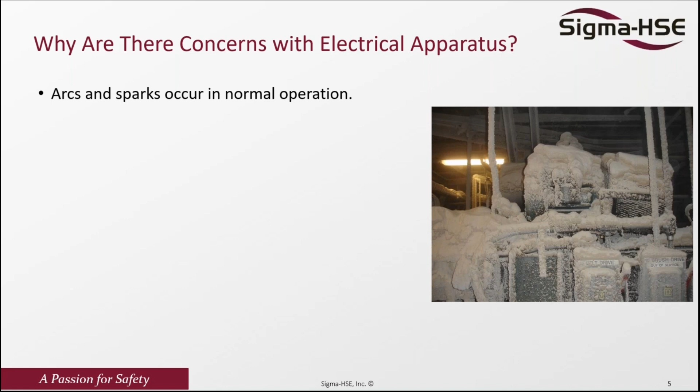And this arc or spark usually can generate energy up to 1,000 millijoules, and this could ignite a dust cloud or dust layer. Also, consumption of energy produces hot surfaces. So as you can see, normally during operation, as equipment consumes energy, it generates heat, sometimes frictional heating, which can actually serve as a source of ignition in the industry.

And malfunction of equipment, such as overheating, maybe of bearings - if you don't have a proper maintenance system, this overheating of bearings can actually serve as a source of ignition, creating a hot surface that could ignite combustible dust or vapor in the industry. Usually, if you don't select appropriate equipment - each appropriate equipment has its own temperature rating - so if I know the properties of my material, I'll be able to select the appropriate equipment for that specific area.

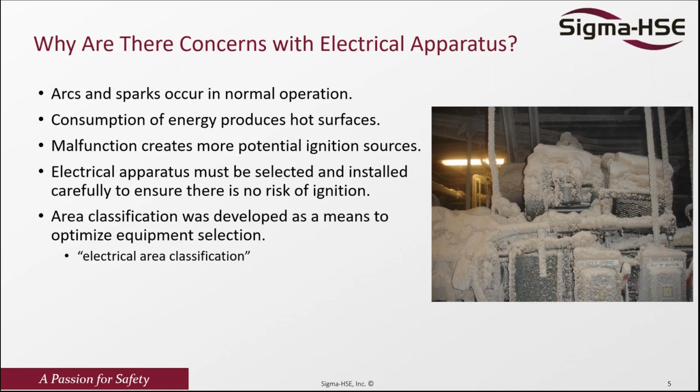And we'll be diving much into the selection of various equipment. Classification was actually developed to optimize equipment selection, and as I mentioned, the goal here is to select the appropriate equipment for a specific area. So the general purpose of hazardous area classification is actually to minimize the likelihood of ignition.

If you want to get fire or explosion in the industry, one thing that needs to be considered is the ignition source. You could have the fuel, you could have the oxygen in the system, or you could have an explosive atmosphere present in the area or process environment. However, without an ignition source, this material cannot ignite, because the combustion process will not be complete. So one thing we always need to consider is how to minimize the risk of an ignition source, or reduce the likelihood of an ignition source associated with electrical equipment in the industry.

And there are several ignition sources which can create a spark or hot surface from equipment. First of all is the motor, pump, agitator, or mixer. During these operations, this equipment can heat up or generate a spark, and in the presence of an explosive atmosphere, that spark or hot surface can actually serve as a source of ignition.

The next aspect is fan or blower. As the fan moves or blower operates, it can also create a spark, and it can also have frictional heating.

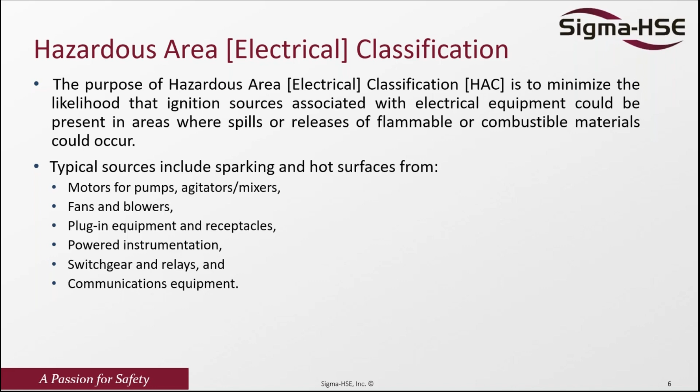So what about the legal consideration? The first thing that comes to mind is the National Electric Code, the NEC, that's NFPA 70, Articles 500-502. This code contains guidelines which give us step by step guidance on how we can classify flammable atmospheres, such as gases, vapor, combustible liquid, fibers, and so on.

OSHA also has a section in 29 CFR part 1910.307, which highlights the selection of electrical equipment in various explosive atmospheres. So OSHA highlights it, and the National Electric Code highlights it. It's something that needs to be enforced in the industry.

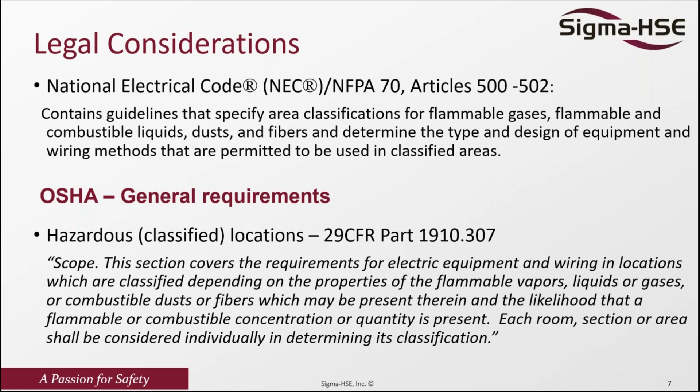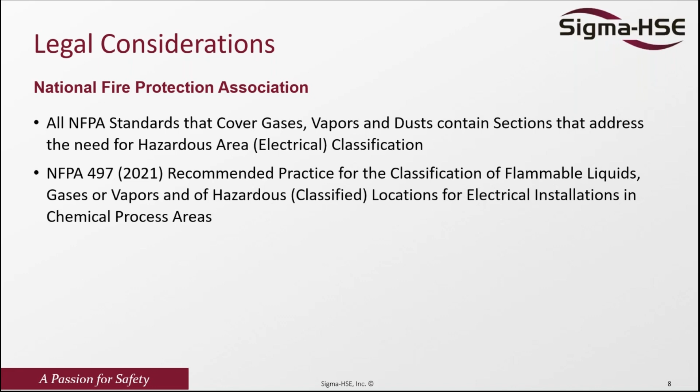The NFPA, the National Fire Protection Association, also has main standards that regulate and show us ways to apply this classification in the industry. We have NFPA 497, which focuses on the classification of flammable liquid, gas, and vapor, and NFPA 499, which focuses on combustible liquid and combustible dust and fiber. These are the various standards that are applicable.

When we go to Europe, we have the ATEX standard.

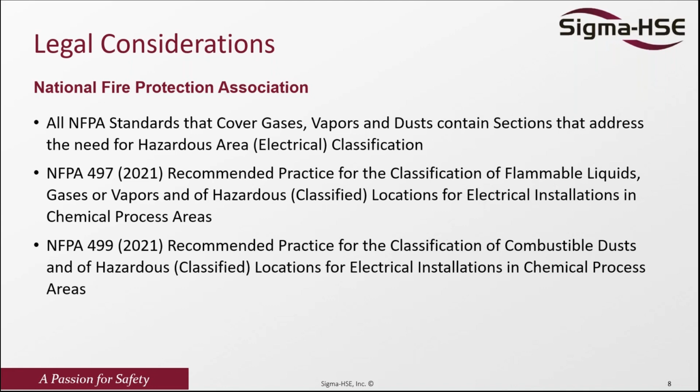So first of all, we jump into the combustible dust section. There's a need to classify combustible dust and understand the various conditions that could trigger a combustible dust explosion. But first, let's try to understand why we classify combustible dust.

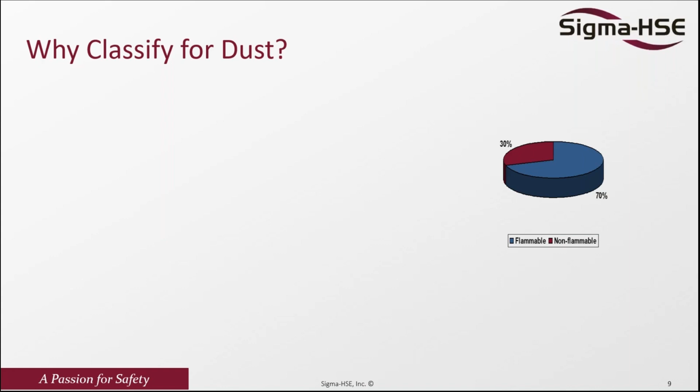The first thing is combustible dust can explode in the form of a cloud, which is very common in the industry. When you have a dust cloud, oxygen, the right amount of confinement, suspension of this material, and an ignition source, you can automatically have a dust explosion. About 70% of the materials we handle in the process industry are actually combustible.

The second aspect is spark and arc in electrical equipment can ignite a dust cloud. A spark can generate energy up to 1,000 millijoules, and most minimum ignition energies of these dusts are less than 1,000 millijoules. So having the right concentration of dust in a cloud form, with any spark from electrical equipment, can serve as a source of ignition and ignite the material.

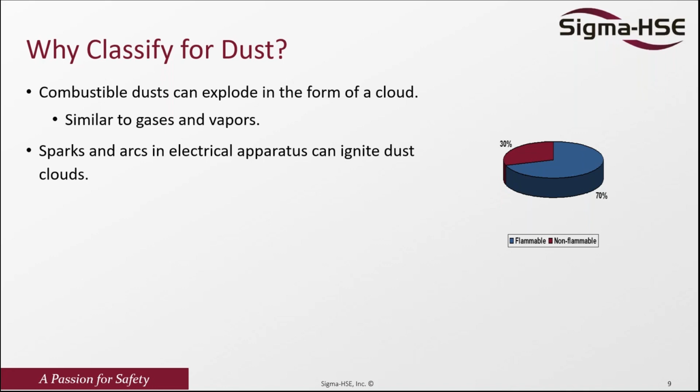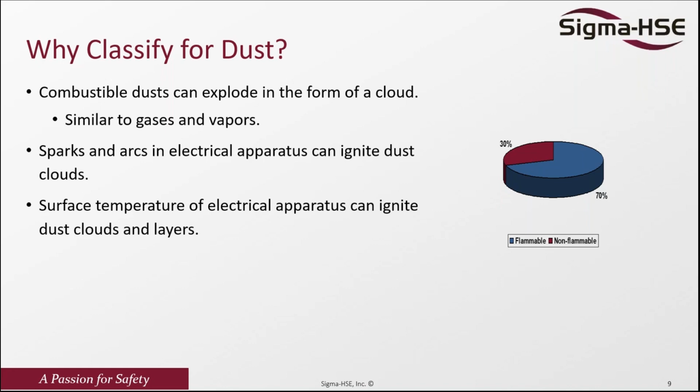Also, sometimes you have equipment that is not rated well and generates heat. Dust accumulation on this equipment can ignite the material and cause a fire hazard. That is something that also needs to be addressed.

So what are the conditions for dust explosion to occur? The first thing that comes to mind is that dust explosion or dust fire is a fire hazard. Normally, in order for fire to occur, you need three main things: fuel, oxidant, and an ignition source. That is the fundamental requirement for any combustion operation to occur.

The fuel could be starch or sugar. As you may know, in the Imperial Sugar situation there was a sugar dust explosion that killed 14 people, injured many others, and caused damage worth over millions of dollars.

We also have oxygen in the air, which is always available unless you exclude it by inerting, introducing nitrogen or argon into the system to replace the oxygen. If you don't do that, oxygen is always available. There's also the ignition source, which could be spark or electrostatic discharge—there are about 13 various ignition sources to consider. For this presentation, we'll focus more on spark or hot surface from electrical equipment.

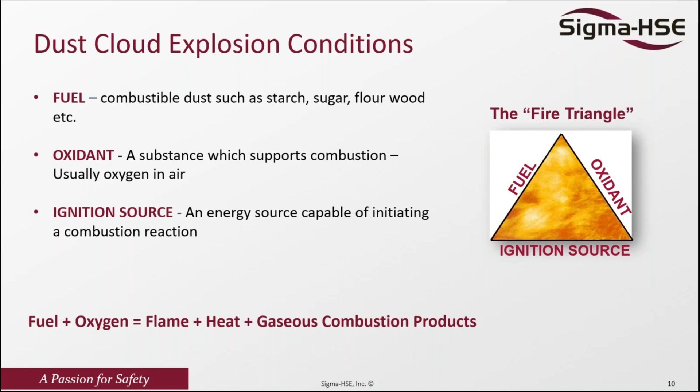So for combustible dust explosion to happen, the initial one was for general fire. For combustible dust, we need to have the fuel, which is very important, which could be sugar. Then we need oxygen in the air, and we need an ignition source. If we have the fuel, oxygen, and ignition source, we get fire. So that is the normal fire triangle.

However, if we have dispersion, now we have four elements: fuel, oxygen, ignition source, and dispersion. In this case, we create something called a flash fire, because we don't have confinement that would retain the heat or energy released in the system.

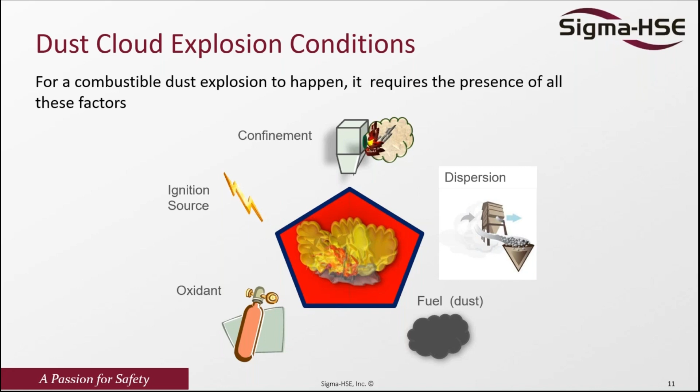However, if we add the fifth element, confinement, such as a bag house, a silo, or a bin, all the flame, energy, or heat released from the combustion operation is retained in the system until the pressure wave released is more than what the material or equipment could handle. Then we could have an explosion. So these are the conditions that could lead to a dust explosion.

One thing also very important in industry is secondary explosion. Secondary explosion happens when you have the first explosion, and there's a lot of dust accumulation in the operation, where the heat release, energy, or pressure wave from the first explosion will shake the whole system, letting the dust fall down. Then the flame from the first explosion will ignite that dust cloud, and you can have a secondary explosion.

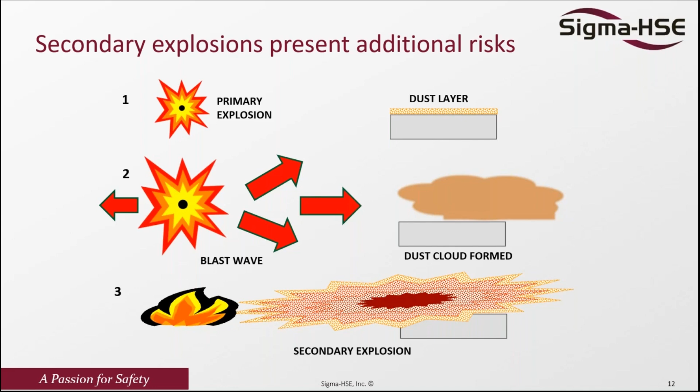Secondary explosions are actually much more intense and more devastating compared to the first explosion, because in this case it involves a larger volume, a larger amount of dust in the whole system.

So the National Electric Code has grouped some of these dusts that we handle at various industries. Normally, if I come to your facility to do classification of your equipment, the first thing that comes to mind is: what type of material do you handle? What group does your material fall into? So the NEC gives three definitions of groups for combustible dust.

The first group is Group E, which focuses on combustible metal dust, which could be aluminum, titanium, magnesium, various alloys, various kinds of steels that we handle in industry. So all of them fall under Group E.

We also have Group F. Group F focuses more on carbonaceous materials such as coal dust. We also have carbon black, charcoal, and so on. So all those carbonaceous materials fall under Group F.

And Group G is the most common material. Any material which does not fall under F or E is grouped into G, which could be wood, flour, plastic, and other chemicals that we use in daily life. So usually if I classify equipment, I need to add the group that the classification needs to be.

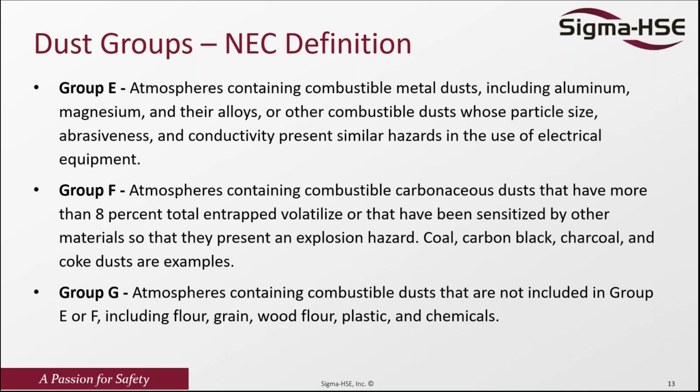So I have this table here to distinguish various classes and divisions compared to the North American system and the European system. In North America we use classes, and in Europe they use zones according to the IEC. So in North America, we have three main classes.

We have Class 1, which focuses on gases and vapor. We have Class 2, which focuses on dust. And we have Class 3, which focuses on fiber and flyings. So that's something we always need to understand. If somebody indicates this is a Class 1 area, our focus needs to be on gases and vapor. If this is a Class 3 area, you're handling fiber material, or maybe Class 2, which is dust.

And when it comes to Europe, we have the zones. We have Zone 0, Zone 1, Zone 2, all falling under gases and vapor. And we have Zone 20, 21, and 22, which are combustible dust. So unlike the American system, where they separate dust from fiber, the European standard combines fiber and dust into one specific group: Zone 20, 21, and 22, covering both dust and fiber.

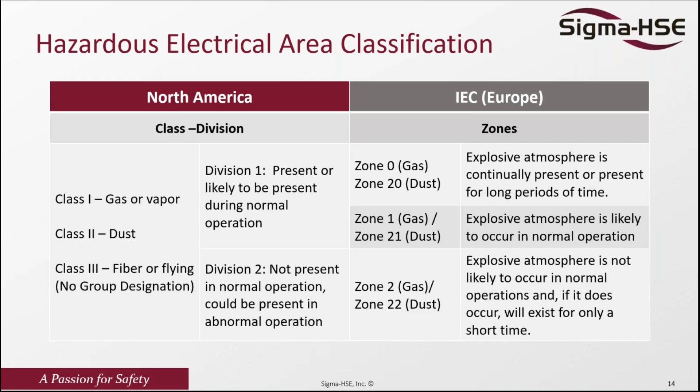In the North American standard, we don't classify inside equipment, but in the European standard, they classify inside the various equipment. We also have division 2, which focuses on where you could have an explosive atmosphere, but not under normal condition or operation - maybe under abnormal condition you could create a dust cloud or a gas vapor could be released. So these are the differences between the European and American standards, and knowing the various classes, divisions, and zones.

So first, for dust, let's go to class 2 division 1. If we mention class 2, automatically what comes to mind is combustible dust, and division 1 location. A division 1 location is a location where combustible dust is in the air under normal operation condition, in a quantity sufficient to produce an explosive or ignitable mixture.

So what is an ignitable or explosive mixture? Where we have the right concentration of dust and right concentration of air combination that could ignite, or where the material combination or concentration is above the minimum explosive concentration. Minimum explosive concentration is the least amount of dust in the air that could ignite - that is what is termed the explosive or ignitable mixture.

Or when mechanical failure or abnormal operation of machine or equipment might cause an explosive or ignitable mixture. So under normal operation, you're not expecting to get this explosive atmosphere. However, under an abnormal situation - and I usually consider this, let me use a bag dump area again as an example.

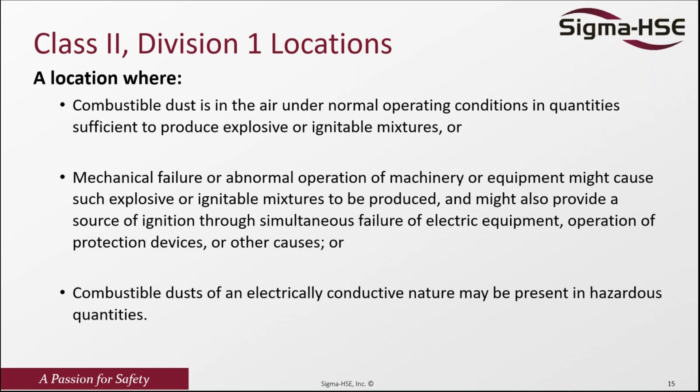And also, anywhere there's metal dust, it's always a division 1 - there's nothing like a division 2 for metal dust. So if you handle aluminum, titanium, zirconium, steel, or iron - any kind of metal dust - automatically you will be classified as class 2 division 1.

What about division 2? Division 2 is where combustible dust is not normally in the air in a quantity sufficient to produce an explosive or ignitable mixture. So under normal situation, you're not expected to get a dust cloud that can produce an explosive mixture. However, under abnormal situation, you can create that.

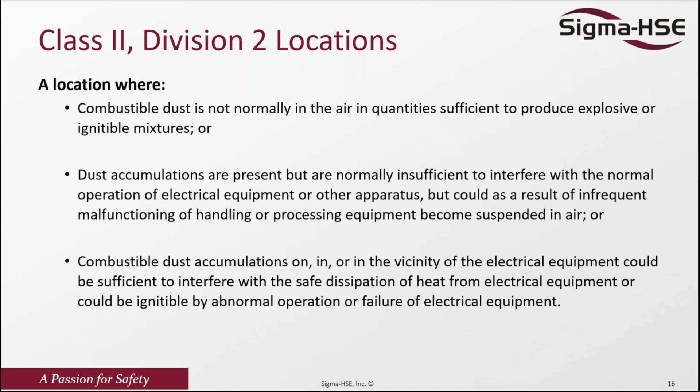And also where dust accumulation is present, normally insufficient to interfere with normal operation - you could have a lot of dust accumulation there. As I mentioned initially, a dust cloud can happen when you have a dust layer that is being disturbed, and this can create a secondary explosion. So dust accumulation at a sufficient amount can also lead to classification of the area or equipment - I'll go to a table to explain this.

So which areas could be considered unclassified? First, areas where material is stored in sealed containers - such as bags, drums, fiber packs, pallets, or racks - so far as they are sealed in their containers where the material is not released to the immediate area or environment, are always considered an unclassified area.

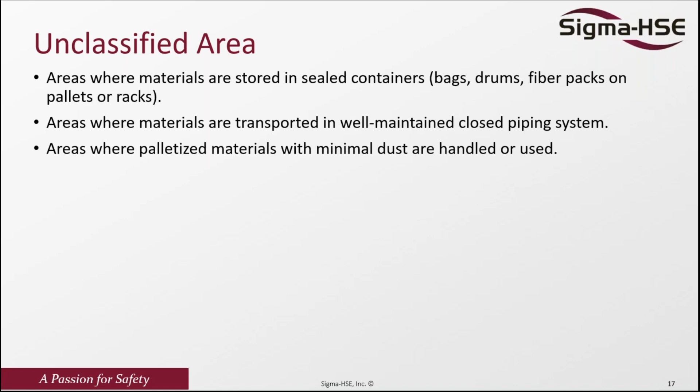Areas where material is transported in a well-maintained closed pipe, such as pneumatic conveying pipes where the materials are in a sealed container or sealed pipe, you don't need to classify it. Also areas characterized by minimal dust - where you don't create any kind of dust in operations, you don't need to classify such an area. And closed tanks or storage buildings, you don't need it either.

And where maybe you are able to clean the dust where you cannot actually use my hand - normally when I go to various operations, I use my hand to check if I can write my name in the dust.

If I can write my name in the dust, then I say okay, you have enough dust cloud, or where you don't have a lot of dust, which is less than 1/32 of an inch, you could actually consider the place unclassified. Where you have good housekeeping, normally in the warehouse you don't generate a lot of dust, and in the production area you don't create a lot of dust. Where you normally create dust is where you have blending operations, powder transfer operations, maybe sifting operation areas, where dust could actually come out from the operation.

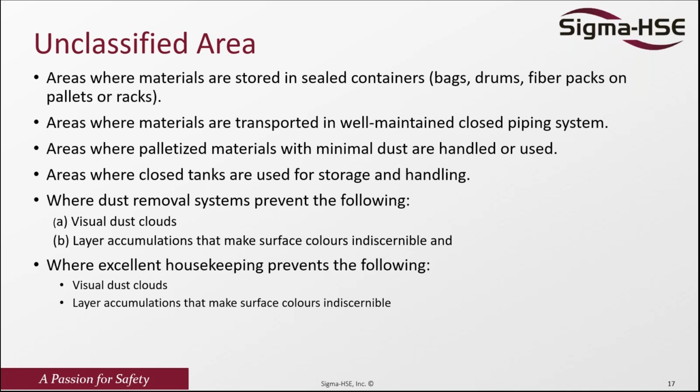So this is the table I was talking about. We can also use dust accumulation level to classify an area. We have Division 1, which is when the accumulation is greater than 1/8 of an inch, and between 1/8 of an inch and 1/32 of an inch, you can classify the area as Div 2. Where you can't see any dust in the area, or maybe less than 1/32 of an inch, you don't need to classify the area.

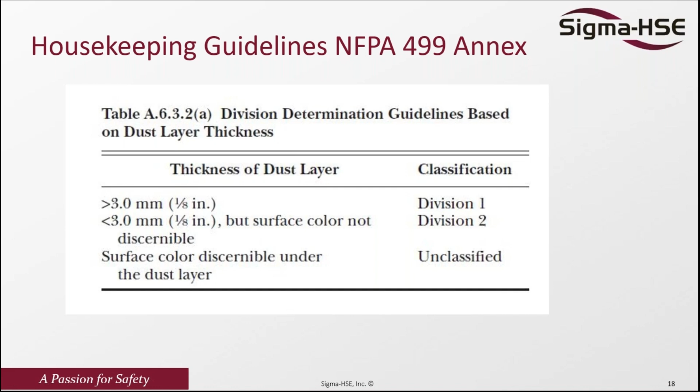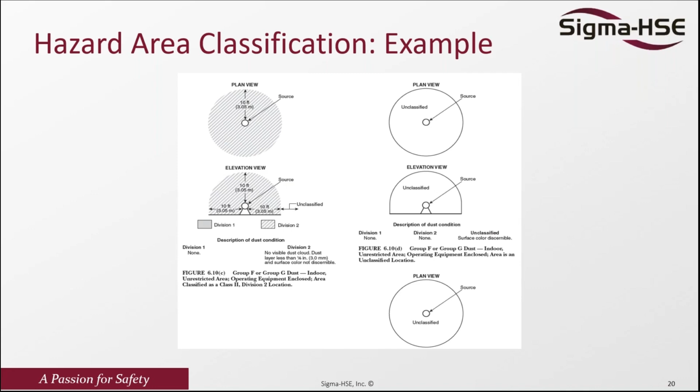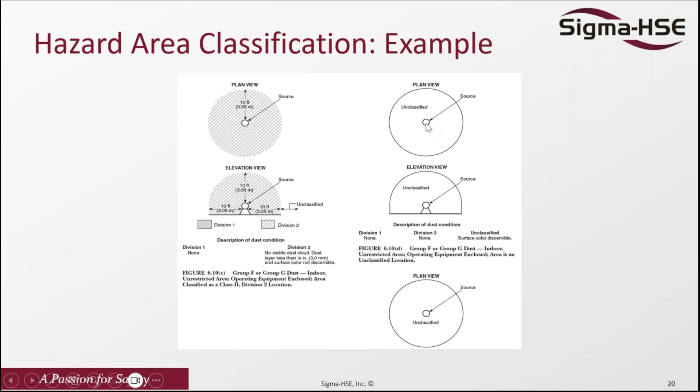And also when it comes to Division 2, you can consider NEMA 4 or NEMA 4X type equipment. Normally your equipment is always rated, and they write the rating on the equipment. So if you think your area is generating a lot of dust cloud in the air that could serve as a source of explosive atmosphere, then you need to know what type of equipment you'll be selecting.

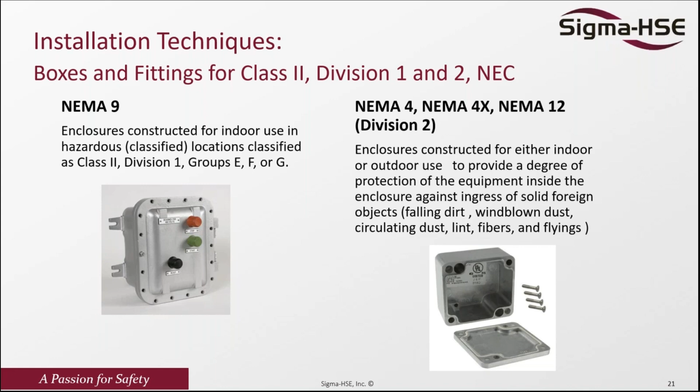Usually when I do area classification for combustible dust, I tell people the only way you can prevent issues - usually for dust accumulation - is to make sure the place is really tidy, because these types of equipment are super expensive. So if there's a way you can keep the place clean, that's always the best. Or if there's a way you can keep the dust from coming out to form an explosive atmosphere, you need to do that. Or if there's a way you can install local exhaust ventilation to capture the dust into a dust collector, then you can do that.

And there are also temperature ratings of equipment. So for temperature rating, first of all, you need to know the various ignition temperatures of the material that you are handling.

So if maybe you have a dust cloud, maybe the material you are handling has an ignition temperature of 300 degrees C, then you know that you're going to select equipment which is a T2 type of equipment. And the producers of this equipment understand those things.

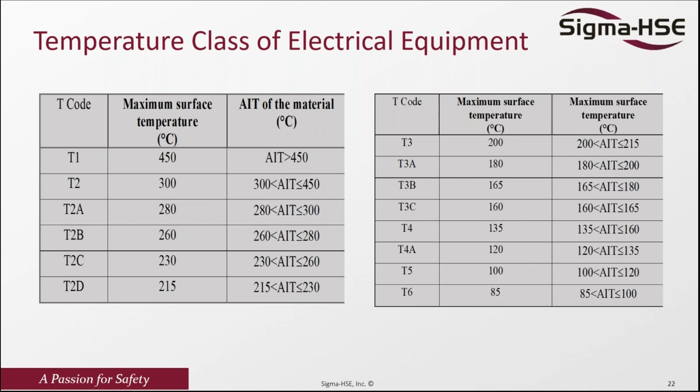And also we have layer temperature, based on the surface temperature of the material, of which we can determine all these ignition temperatures in our lab in UK, where we can do all these tests. So based on the ignition layer test or ignition cloud test of ignition temperature of cloud or layer, we will be able to select the appropriate equipment for your facility.

What about combustible liquid or maybe liquid or gases? Usually you still need this triangle for ignition of a cloud, mist, vapor, or gases. You need the fuel, which could be your natural gas or toluene or any kind of combustible liquid or flammable liquid that could be present at your area. You also need the oxidant, you need the various ignition sources.

And normally for liquid, you need to know the flash point, because if the flash point is above the ambient or the operation temperature, automatically you're not going to get a vapor which is going to ignite. We need to know the flammability limit of this kind of material to know whether the amount of gas or vapor that is going to be released into the environment is going to be within the flammability limit range or explosive range. And also we need to know whether we have sufficient oxygen.

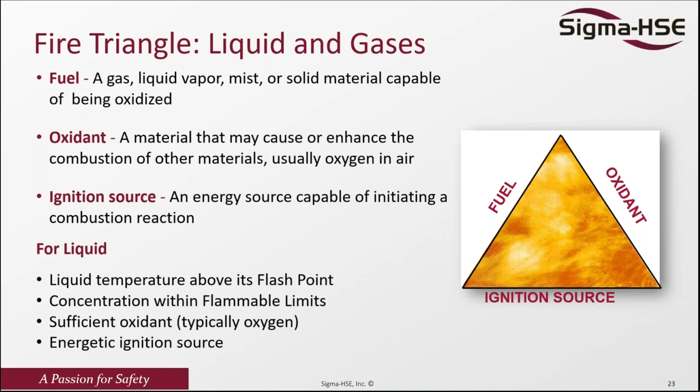As I said, in case you don't exclude oxygen from the operation, automatically you are going to get oxygen in the air. The way to exclude could be nitrogen purging or argon or carbon dioxide. If you don't do that by inerting, that means you always have the oxygen available in the system.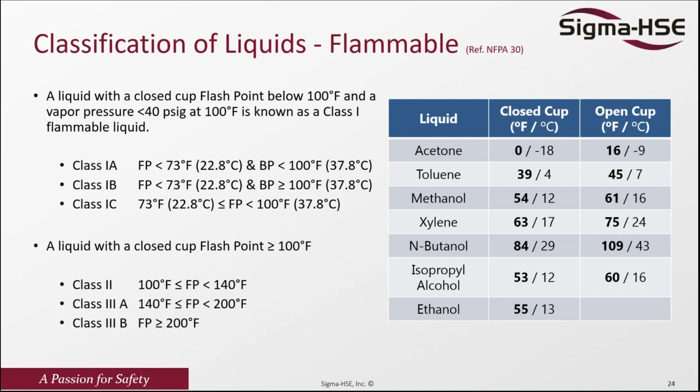And so all these are something that we need normally, before I come to our facility for classification of flammable liquid, I need to know this to know what is under normal operation, are you going to create a cloud of vapor in the system? And also I need to know the auto ignition temperature of these materials.

So how do we define class 1 division 1? As I said, class 1 is always flammable gases, vapor, or liquid. So division 1 is where you have explosive or ignitable concentration of flammable gases or liquid that actually produce vapor, because liquid in its pool form is not going to actually get any explosion hazard. It can burn at the surface.

That's why we need a flashpoint. But in the vapor form, it can easily ignite. So where these liquid or gas or vapor actually exist under normal operation conditions - where maybe they have an open system where for liquid they have a sampling point, and this kind of operation automatically will generate vapor under normal operation.

And also where you have a combustible liquid, so when you have liquid that is always above the flash point under normal operation, in this case you could actually create a div 1 environment.

And also when we know that breakdown of faulty equipment or process might release ignitable concentration of vapor - in this case, if we are certain that in case something happened to this system, automatically we are going to create an explosive atmosphere, that means we need to also classify the place as div 1.

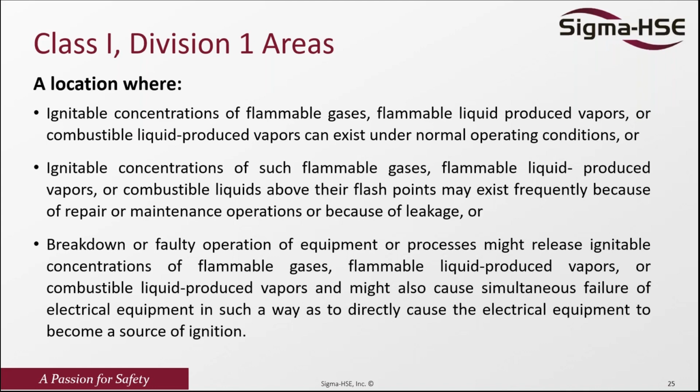What about div 2? Div 2 is in which volatile flammable gases or flammable liquid are handled, processed, or used, but the liquid or vapor will normally be confined within a closed container. So normally, in case the place is an open environment, or under normal operation, you are not going to create an explosive atmosphere.

In this case, there's a possibility of generating material, but to create an explosive atmosphere - because of maybe a good ventilation system which is going to exhaust the material into the atmosphere or into a system - you will never get an explosive atmosphere under normal operation. However, under abnormal operation, where the system could rupture, where you will have flanges, various valves, in this case, if there's any abnormal situation, you're going to have a leak of gases or vapor.

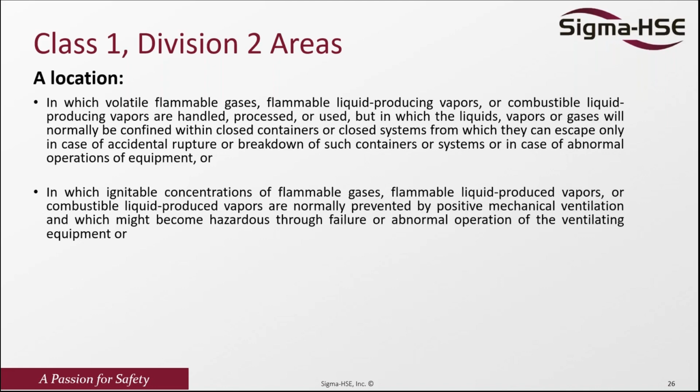In this scenario, we can classify the place as Div 2, in which there's a positive mechanical ventilation. If you have positive mechanical ventilation, that might become hazardous through failure. Sometimes we control flammable atmosphere in industry by using a positive ventilation system, which could reduce the amount of material cloud or vapor generated in the system. However, in case that ventilation system's fan or blower breaks down, you're going to have an explosive atmosphere. In this case, we have to still classify the area as Div 2.

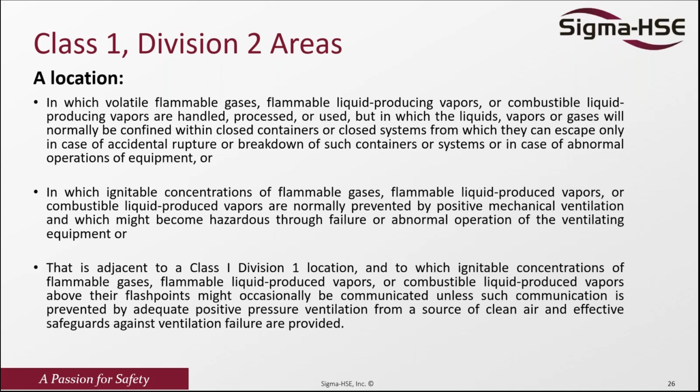So let me move to the next one here. Where do we classify an area, or how do we consider an area as unclassified? This is where adequate ventilation is provided, where combustible materials are contained within suitable or well-maintained closed pipe.

So number one, you could have a really good negative ventilation system, a good ventilation system, where you believe that automatically you are not going to have any kind of dust cloud or gas vapor in the system. Then the place should not be classified.

Also, where you have well-maintained closed piping, where there's always a pipe with no flanges, nothing which is going to burst or release any kind of gases or vapor, in this case we should consider the place as unclassified.

Also, where adequate ventilation is lacking, but piping systems are without valves or fittings, as I mentioned, where maybe you have no fittings or flanges or similar accessory that may be prone to leak, in this case you don't need to classify the area.

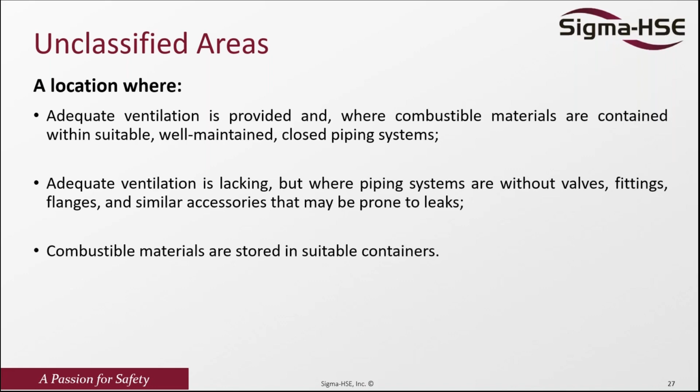Where combustible materials are stored in containers - for example, if you store combustible materials in a sealed container in a warehouse, that means you don't need to classify, because even if there's a release of this material, you're not going to have a vapor pool because they are below the atmospheric temperature.

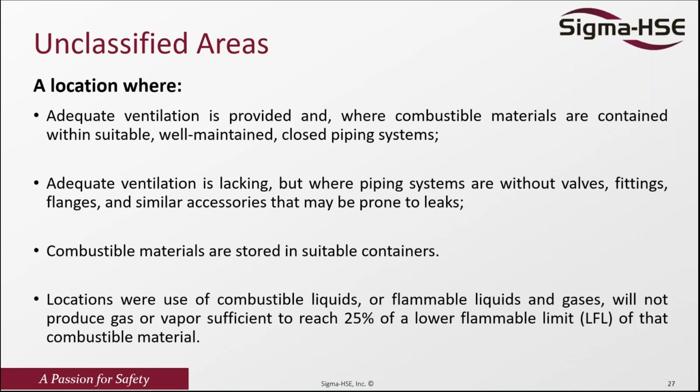You're not going to have a vapor above the atmospheric temperature to create a cloud. Also, locations where use of combustible liquid or gases will not actually produce a gas or vapor sufficient to reach 25% of the lower flammability limit - normally in some processes they have concentration meters to determine the flammability limit. If a risk assessment has been done and we know the concentration will never exceed the lower flammability limit, then we don't need to classify the area.

So what are the various types of protection or intrinsically safe equipment or installation that we need in various flammable atmospheres? The first one is 4 to 20 milliamp DC instruments - this kind of equipment is actually intrinsically safe. 2-wire transmitters, various thermocouples, and this kind of equipment naturally come as intrinsically safe, meaning they're not going to create a spark or a hot surface that could ignite various materials.

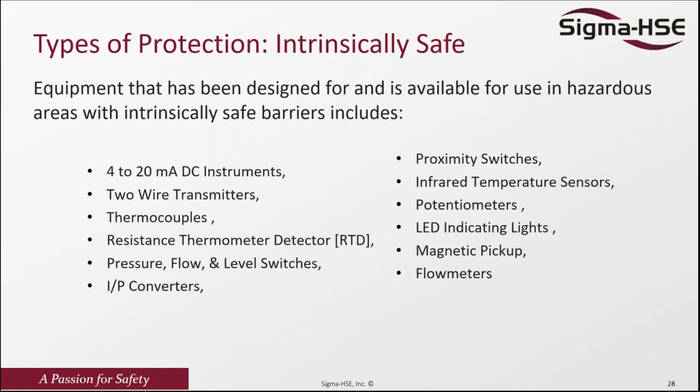We also have various other kinds of equipment. For Division 1, we have explosion-proof equipment - equipment that is tight enough to prevent any vapor or gas from penetrating into the system, or that won't generate a spark or arc. We also have intrinsically safe equipment, purge or pressure equipment, and NEMA 7 explosion-proof equipment. All these types of equipment can be used in a Division 1 area, that's Class 1 Division 1 area.

And also for Division 2, we consider that any equipment suitable for the Division 1 area could also be used for Division 2 area. We have non-sparking equipment, non-incendive type equipment, and NEMA 7, NEMA 6, and so on. All these types of equipment can also be installed in Division 2 areas.

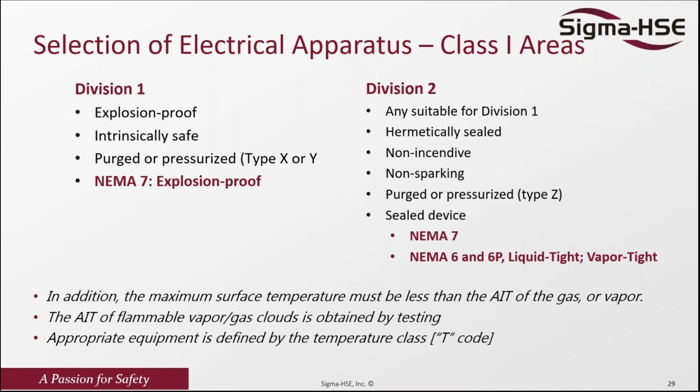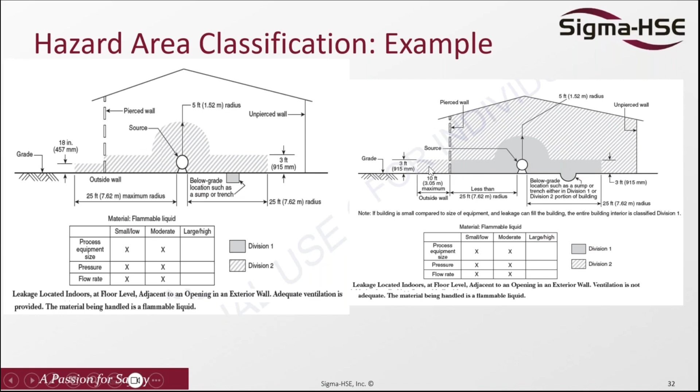And also, if it is division, after Division 1 we always need to do Division 2. Let me come back here - this is a diagram I picked from NFPA 497. We have a source here, and for Division 2, we have 10 feet from the source, and 3 feet from the source to the top.

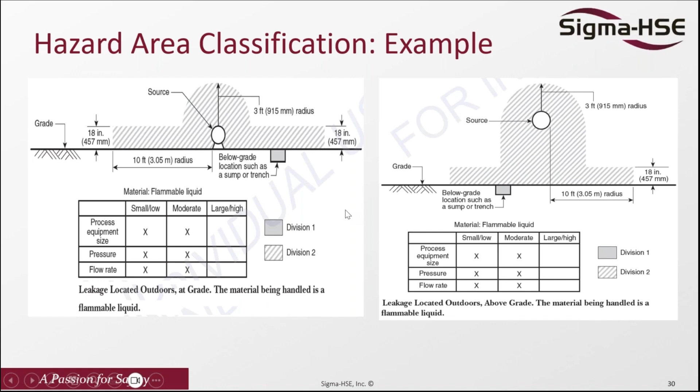Normally a lot of factors influence it, and there could also be a pressure factor in case the material is pressurized - that means the extension of classification goes further. Also, if it's normal atmospheric condition, in this case you need to have the normal classification.

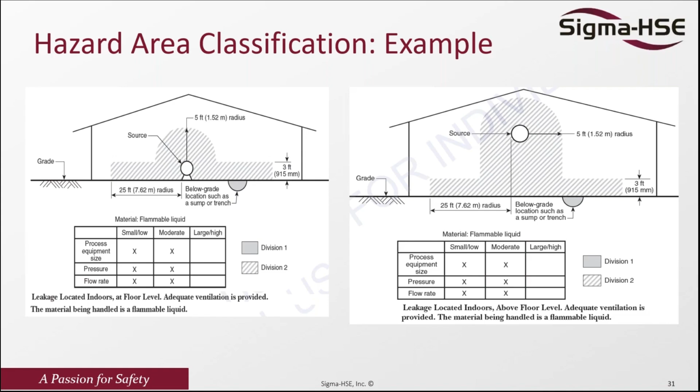I think that brings us to this. I know people have questions, so I wanted to cut things short so we can have more discussion. That brings us to today's webinar. We have a full 2-day training on area classification. This webinar is just to give a general overview of classification, to understand the various divisions and classes, and the type of materials that fall under various divisions and classes, and the various types of equipment. However, if you want more detail with various examples on how to do classification, you can contact us directly - it can take a whole day to do this. So this is just a general overview, and thank you very much.